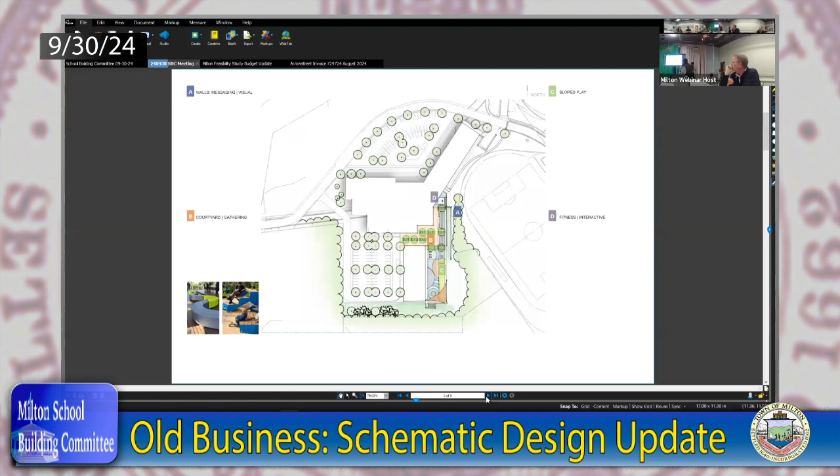Can you go back to the previous image? Typically, what Jane's suggesting is that some zones of that could be vertical play area—we could take the wall and engage it in some way so that it's occupiable, it's active, and take advantage of the fact that we have this height. So that's one of the options we're looking at.

In the architecture part, we'll talk about how we're navigating this a little bit more, but I just want to put some of the key places we've acknowledged here. So the idea is to have this open play area with a variety of structures, some murals, things to make it vibrant and fun. She's also drawn in a canopy area for shaded play.

Shaded play, if you've been reading the Globe and the New York Times, has become a really important part of the conversation when we're talking about play areas. A lot of play areas have been asphalted over, and then they paint stripes and things to make it fun. But what people are realizing is you need more landscape and shaded area to make it comfortable for everybody.

So this is one of the gestures they put in to make it more comfortable and fun for the kids. And all of this is accessible—it meets the ADA requirements and it's navigating these existing slopes.

So more examples of that vertical play area, different heights for little kids and older kids. We talked to a working group about what was acceptable, and we'll start integrating a little bit more of those options. But in the next slide, I'm going to hand it over to Andrew, because he's going to talk about how this impacts architecture and what we've done to make it more interesting from the building side.

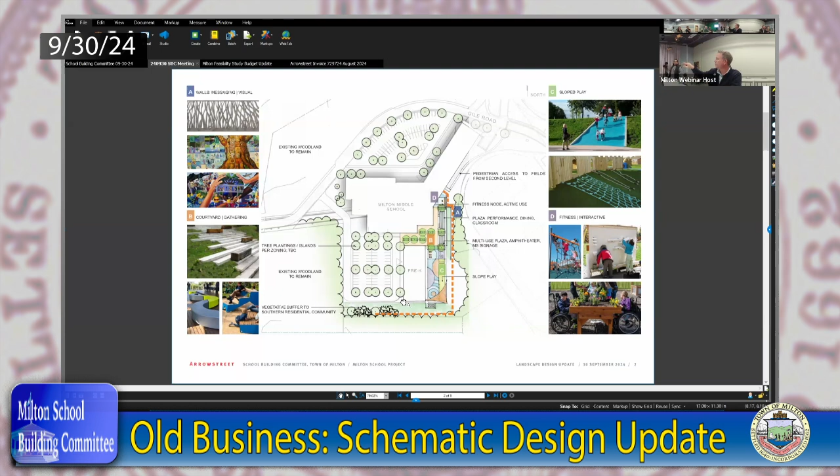The topography, like you were saying, the 15 feet is up at that corner. If you're on Gile Road and you look at the field, you're 15 feet up. But as you walk across the site to where the shade structure is, it starts tapering, a lot less. There's still a differential, but the 15 feet is just where the field is, and then it tapers down.

So you're gonna have a less substantial retaining wall, but you'll still need something because it actually tapers down lower here, so you need the retaining wall to hold it in reverse. I just said that so everyone doesn't think it's a 15-foot retaining wall all the way over there. Still pretty good size though, it's going from like 4.5 feet up to 9 feet along the bottom there. So we definitely like to reduce that, for all the different reasons you can imagine.

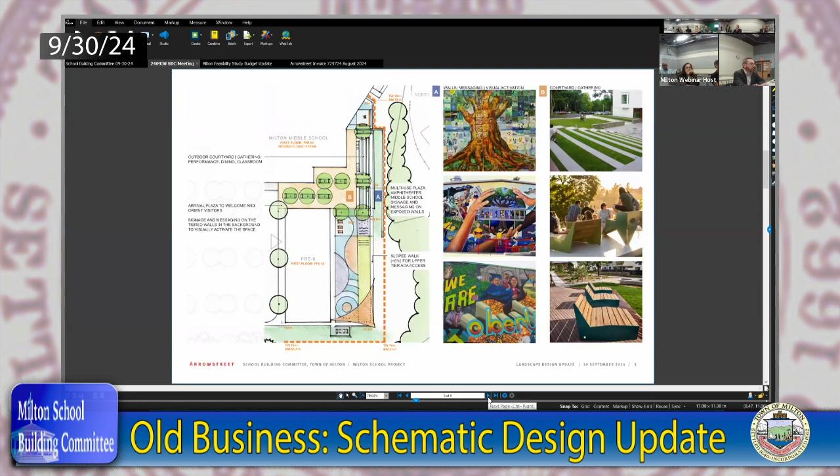See if anybody online, nope, nobody has their hand up. But, maybe right.

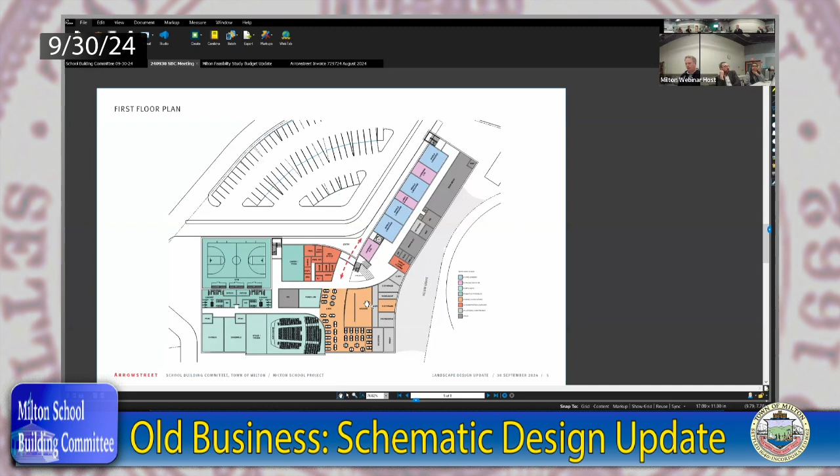If you go up to the second floor for a second, just to pick up on Shonali's comment, could you zoom in a little bit on the center of the plan there. This second floor is kind of an exciting setup programmatically because we've got the media space and the associated guidance, arts, STEM, and tech. All of these elements are lobes around that center space, accessible from the outside and in.

One of the things that's becoming more common in education and the relationships between middle school and high school is mentoring opportunities between the high school students and the middle school students. You could imagine the high school students coming in and meeting in the library, and it being a very natural and welcome connection between the two schools.

If there's not, well, why don't we go down to the first floor and I'll continue walking everyone through the current organization. And then as questions come up, please just jump in.

So I think we touched base on this northern wing a little bit. Seamus, if you wouldn't mind zooming into the middle zone, I'll walk us through that a bit. So I started to mention the entry and the public sequence into the cafeteria. The other thing we've done here is made some nice improvements to the location of the auditorium and music spaces. This block located here consists of a 350-seat auditorium with the stage and drama.

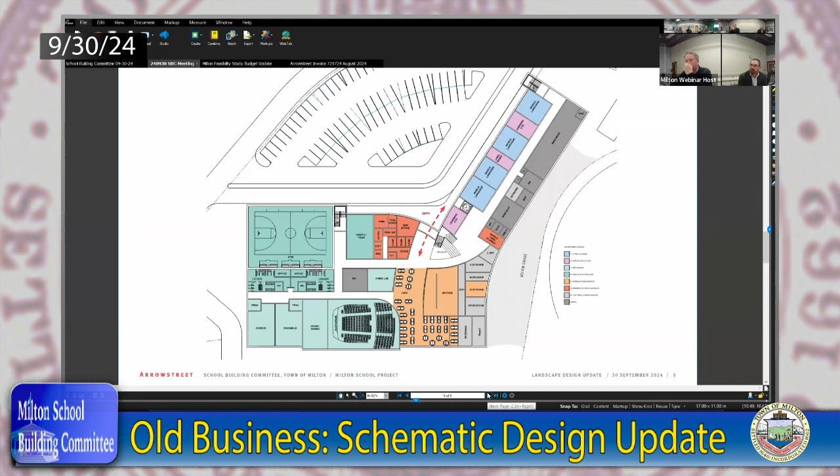Thank you. Sure. What we haven't done yet is figure out what types of tables they're going to use, whether long thin ones or round ones, and what works best for the middle school.

We did want to point out, if you can go back one, Seamus, and zoom in right there, the thinking about having a sort of quiet zone that could be enclosed, where some students could eat in a more quiet setting, which can be helpful for some of them. And you can close it off. It also serves as a secondary conference room after hours if there are events.

So we spent a little time on this floor already, just to review. We've got this central stair and double-height space connecting the first floor to the second floor. We've got the media and library space, and the orange piece you're seeing here is the guidance programs. One of the things we learned is that it's quite desirable to have this co-located with the media space, as opposed to down at the main office.

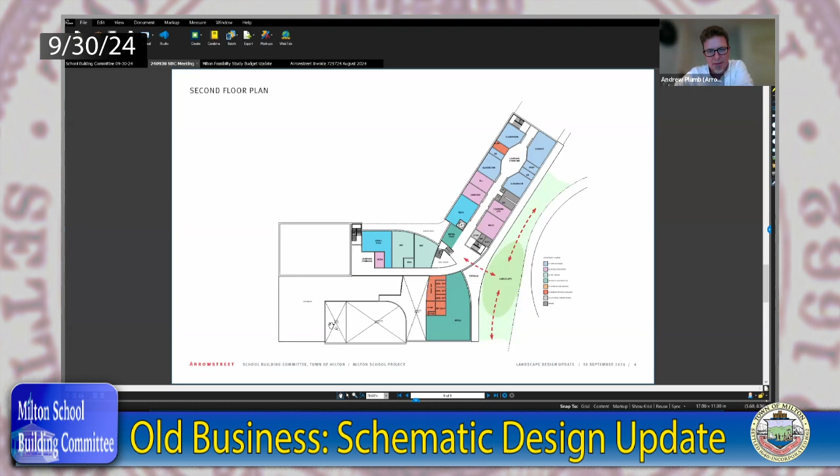So we're looking at ways to have you arrive at the library and have the ability to go off into the guidance area, where there would be the opportunity for some overlook to the cafeteria below. Maybe you could zoom in a little closer on that, Seamus. There's some conference space here that could be useful for guidance or other uses, because it's adjacent to the media space and a certain number of offices.

We are aware of and sensitive to sound traveling. So one of the things we're thinking about is that there might be a visual connection between the media space and looking over to the cafeteria, but perhaps not an open-air connection, because it might be distracting.

We also, on this level, have co-located arts and the STEM and flex room and the tech room on this other side. We imagine there's opportunity here for either exhibition or media-related use—there could be a book kiosk or something that's not just in the main media space.

When we had conversations with the school about strategies for media, we talked about this range of possibilities, being either that it's all in the library in the traditional sense, where it's the destination.

Some schools have done things where media is completely distributed throughout. This is closer to where everyone seemed comfortable, with some amount of distributed media but more on the end of there being an actual destination. This allows a both-and approach, where there's a destination media space, but also an element that's a bit more informal.

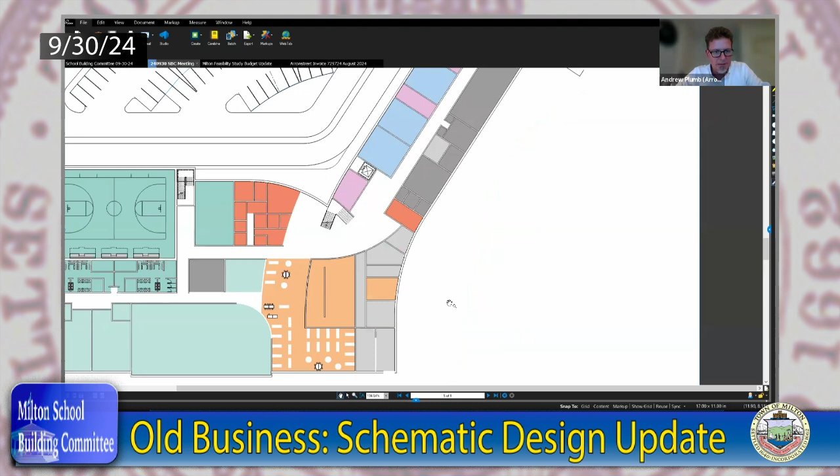Could you go back just to the first floor? So this zone would be below the media - basically everything adjacent to the auditorium. The double height space would be this whole part.

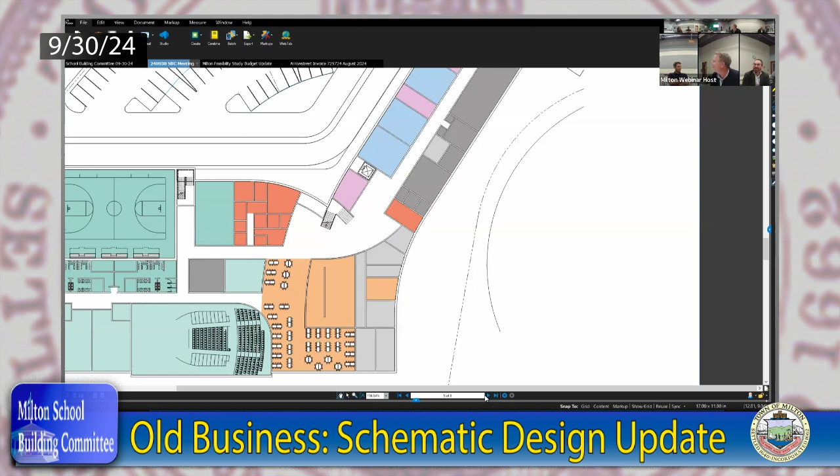Each chair coming in? No, that's good - they're coming in like on sleds. Maybe these more rounded chairs. Look on that one. Okay.

Thanks, Andrew. So then if we pan up a little bit, face north a little bit, just to get the rest of the floor plan in there.

Here you'll see our typical team structure that we've seen before, which will occur on the upper levels too. This is the 3 core classrooms plus a science room and related small group rooms, a teacher planning space, and the science prep room, organized around a learning commons space. This chunk is one of the building blocks of the building up above, which we'll see when we go upstairs.

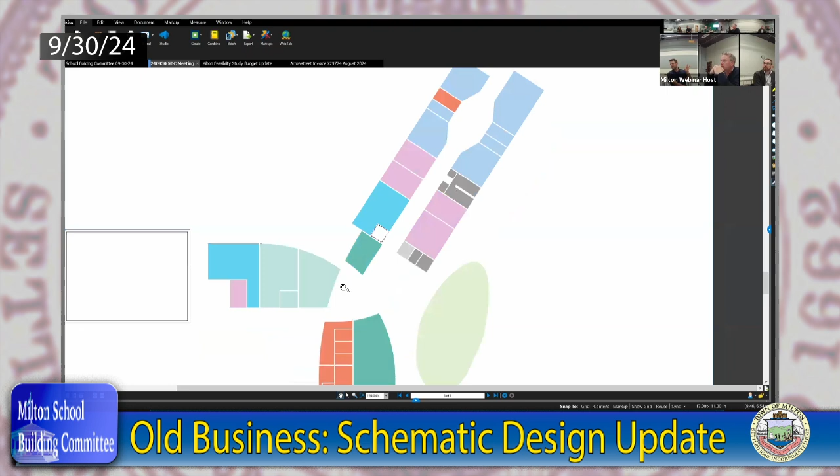That way, the room is still right there, and there's the ability on the upper floor to access those 3 spaces. That stair, when it shows up, will be here. The idea is that when you take that stair, you exit onto this large landing area and can either egress out of the building or continue down the main stair. That's the point I wanted to make.

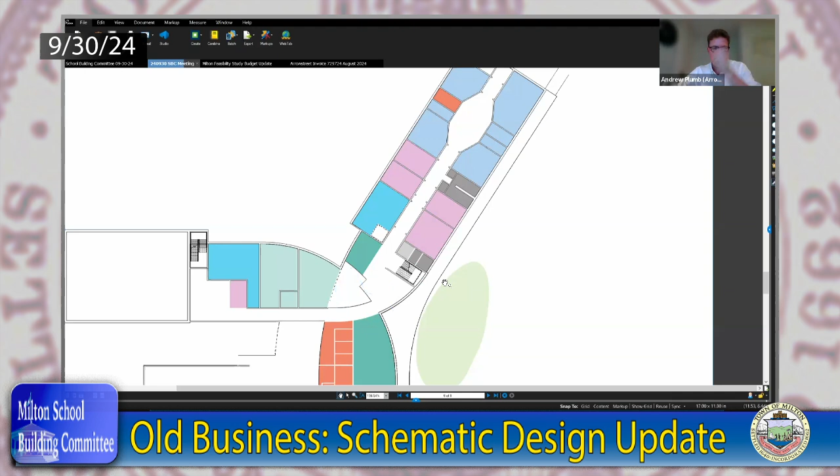So why don't we go back up again in the stack - page 7, then page 8, which is the fourth floor. You'll see it's very similar to the third floor. Why don't we go ahead and do that one?

So here you're seeing nearly an identical floor plan with the teams on the two ends anchoring it, and then this central team. The main difference here is that there's just a couple of different special education programs, but in similar locations to the floors below. So that's sort of the update on the floor plans.

Where is the elevator? The elevator is located here.

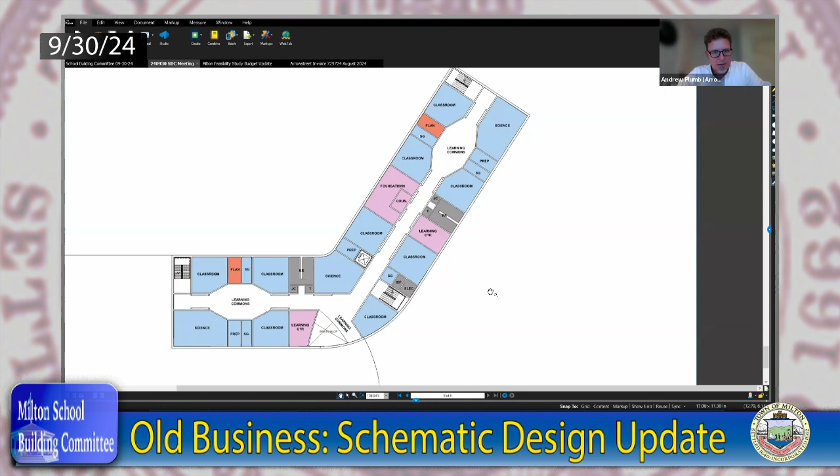So Andrew, on a similar note, for egress calculations and occupant counts, are you guys doing that for toilets, bathrooms, fixtures, and all? Yep, that's right. So hopefully the next iteration, you'll start seeing those populated.

We've gone back and forth with Code Red quite a bit about the occupancy, and as you know, it's two different calculations. What we've been focusing on primarily is the emergency egress population. And as Andrew was saying, we've added this third stair because we're right on the cusp of that threshold. That threshold is 500 people, and we have calculated 498.

So we've added the third stair because if we move a room, or switch a room, or add another person or two into the special education rooms, we're going to be over that threshold. I just don't foresee us getting approved to not have the third stair, so we're being really cautious. If for whatever reason things change and we're able to eliminate it, that's great, but right now I'd rather err on the conservative side.

So we do have two restroom banks stacked on each side of the floor, which will carry the number of toilet fixtures. I don't remember the count off the top of my head, but we've worked with Code Red to get those counts. I think we're slightly over the first floor because we have the locker room fixtures, plus restrooms over by the world languages, plus the additional restrooms in that center next to the piano lab. But we're leaving that because if you have a full auditorium or a full game, you're going to need those extra public restrooms. People are less likely to use the locker room. So at the moment, that's our perspective on it.

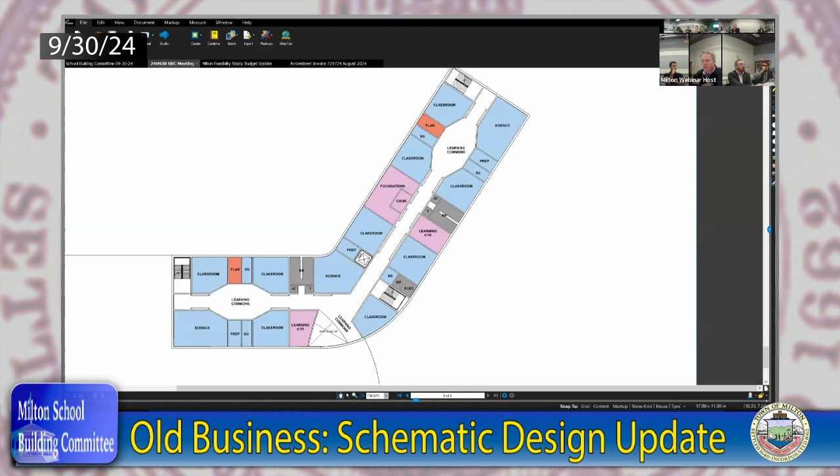Any other questions? Don't see anybody. Andrew, anything else you need to update or weigh in on? Nope, I think that's it for tonight. Okay, everything looks great. Thanks. No other questions? We'll get moving. Yeah, just feel free, I can just make comments.

I really like the changes you made. The idea of essentially having, based on how you're describing it, this kind of glass column right there in the middle of the building, right along that curved spine, to bring the glass right into what otherwise is a pretty dark hallway, is great. Should look really well.

And then the media center as well — I was concerned about it being too open, in terms of, I know what we were talking about at the other meeting, just with all the sound coming from the lower level, given how open that would be. But the idea of having a lot of glass bringing light into the cafeteria and out back, the cafeteria having a lot of light.

I've shared similar concerns about the logistics of receiving, especially if we're trying to have outdoor seating areas over there — I don't know how you can bring trucks back there every single day for receiving. That is a concern as well. So I think that bottom floor logistics is still a little bit iffy, but otherwise it continues to look really good.

John, you get your hand raised? Yes, thank you. I was wondering too, again, could I get a copy of that presentation? I know they tend to come out at the last minute and I didn't see it in the package. They usually send them after the fact, because it wasn't in the package. Okay, thank you — take the link with it after the meeting.